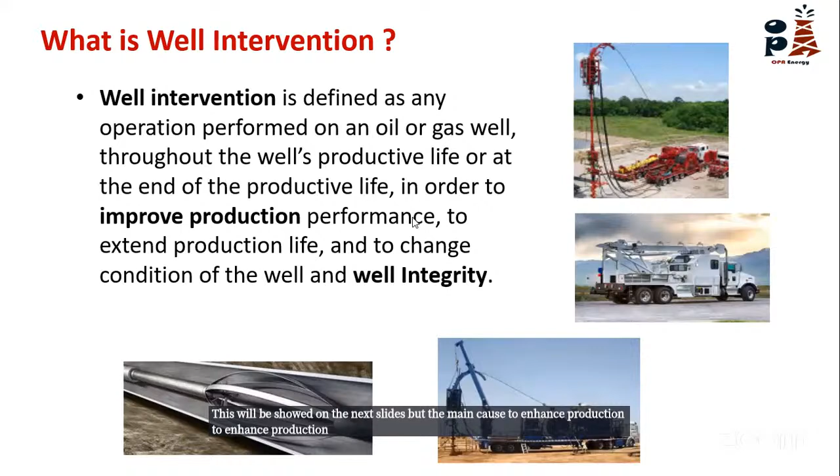What are the most common techniques used in well interventions? We have wireline, coiled tubing, and snubbing unit. These are the most common well intervention techniques.

Wireline has four types: slickline, e-line, braided line, and digital slickline. All four are called wireline, not just slickline or e-line. Wireline, coiled tubing, and snubbing are all types of well intervention. Each technique has a unique application and advantages that we will explore in the next slides.

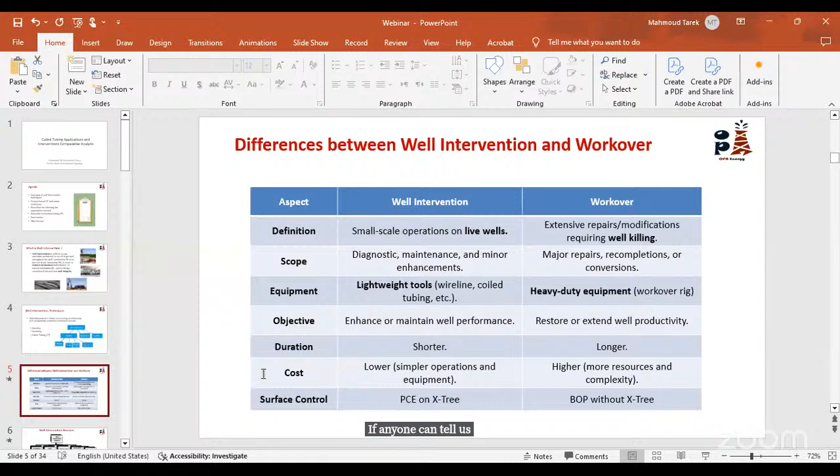Let's break the ice with a question. Can anyone tell us, in the chat box or by voice, what is the difference between well intervention and workover? You can simply raise your hand and I will open the mic for you, or just type in the chat box.

Hello. Okay, go ahead, Emily. Thank you, sir, for the privilege given to me to answer the question, sir. I think one of the differences between workover operation and well intervention...

The workover operation has to do with trying to revive a dead well, while for well intervention you are working on a live well that is still producing, but the production rate has declined drastically and you want to revive it. For workover, the well is dead already, no longer producing, but you want it to be producing again. This involves rigorous activities because you have to remove the completion and install a new completion for the well to be restored back into production. Thank you, sir.

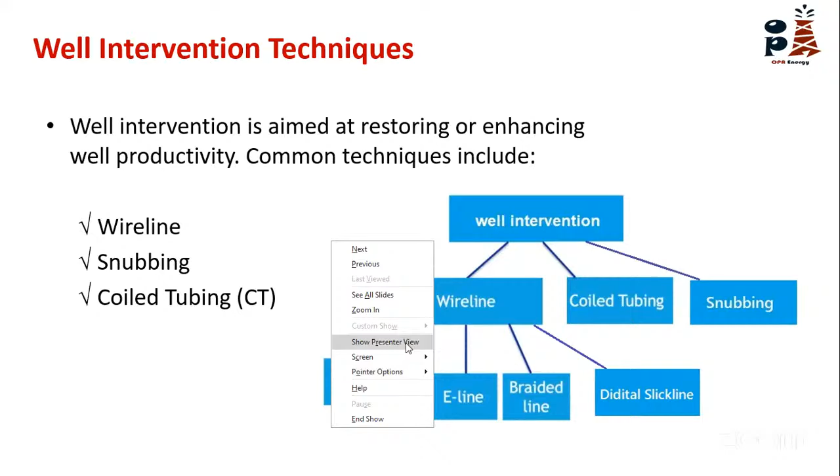As Emily said, the main difference between well intervention and workover: well intervention is implemented on live wells, and workover on killed wells. A live well doesn't mean open or closed, but capable of flowing. In live wells, the hydrostatic column in the wellbore is lower than the reservoir pressure. In a killed well, we introduce a hydrostatic column to overcome the reservoir pressure through the wellbore.

Other main differences: in well intervention we introduce lightweight tools such as wireline and coiled tubing, while for workover we introduce heavy duty equipment using a rig. Also, in well intervention the duration is shorter and the cost lower, but in workover the duration is longer and the cost higher.

For surface control, we use PCE, pressure control equipment, on the Christmas tree for well intervention, including lubricators and pipe joints to contain the pressure over the well. In workover, it's BOP without a Christmas tree in most applications. Is it clear?

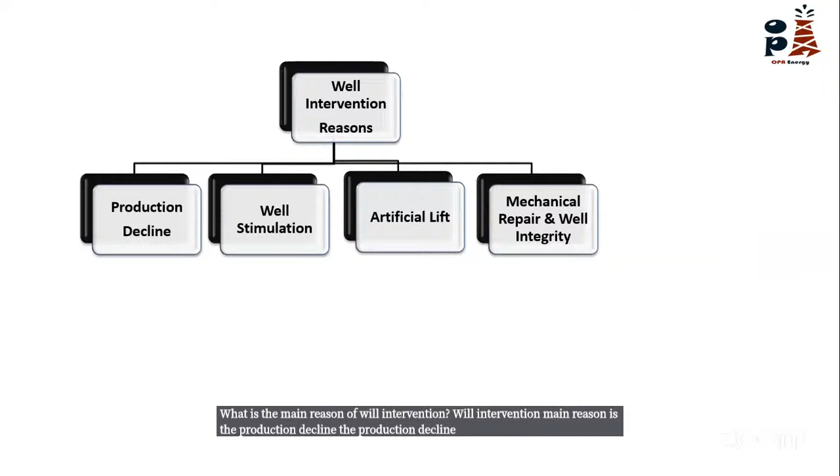If you are a production engineer in your company and you have a well issue, you have the decision to take the well intervention method to implement and solve the production decline effect. The production decline problem can be solved using one of the well intervention techniques.

For example, if you have a producing well at 2,000 barrels oil per day, and after testing the well you find production has dropped to 1,000 barrels oil per day, what should you do as a petroleum engineer? You must find out the main cause. This is the importance of well intervention.

Either sand or scale deposition inside the tubing, or accumulation in the reservoir, should be removed using one or more well intervention techniques, as we'll see in the next slides. If there is increased water cut, you should do a water shutoff or a reperforation.

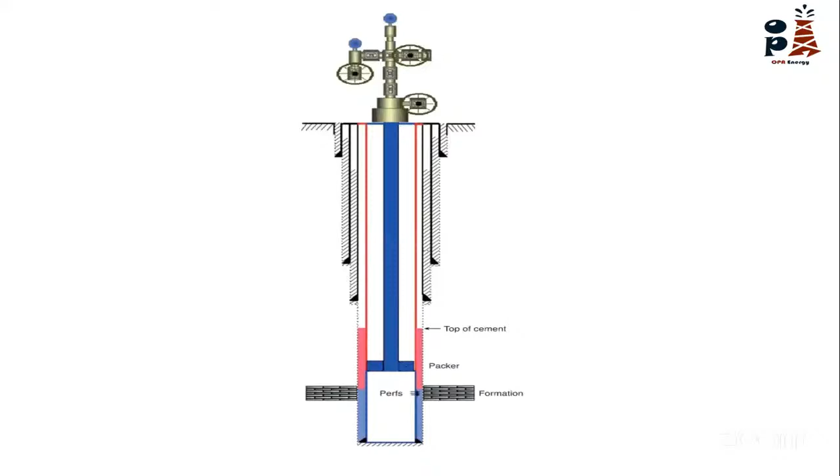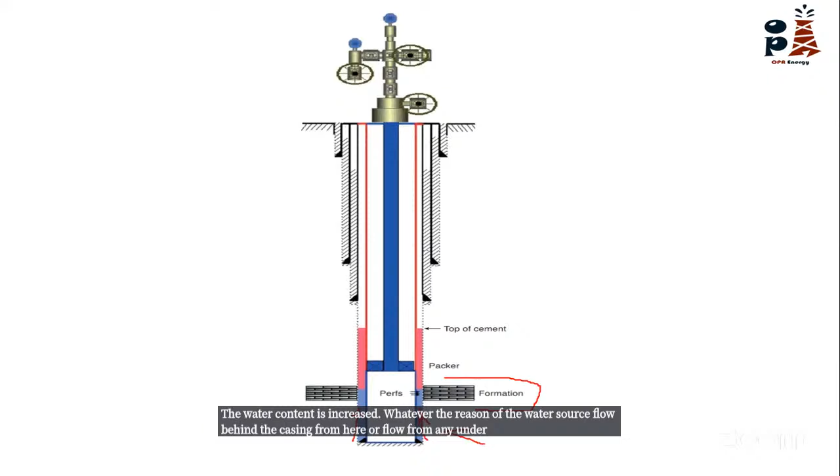Let's have a look on this well. What is the meaning of water shutoff? The concept of water shutoff is isolating the formation interval that contributes high water content, as we need to shut this interval off. The producing formation produces oil, water, and gas. So if the water content is increased, whatever the reason, whether water flow behind the casing from here or flow from any underlying formation, the water is invading this producing formation and the total water cut increases to the surface. So what can we do about this problem causing production decline?

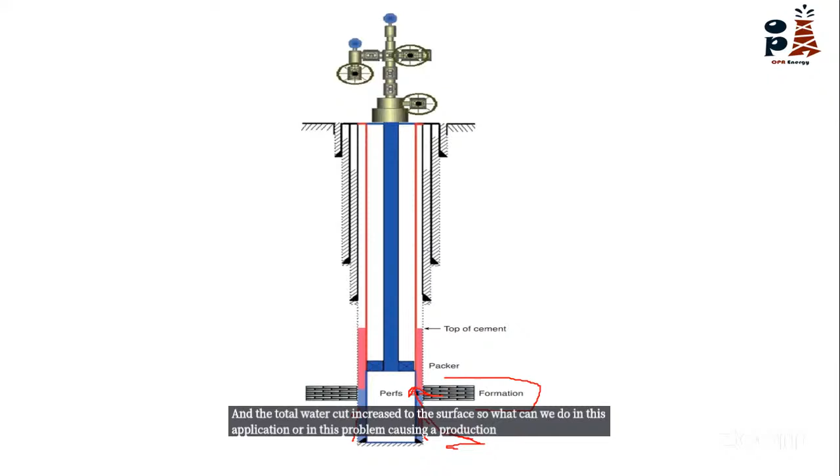You must firstly run something called PLT. What is PLT? Production logging tool, run in hole with wireline, electric line I mean. Wireline tools are deployed for this well with pressure and temperature sensors to read pressure and temperature of the formation and flow rates, which specify the contribution of water from each interval to know where the water content is coming from. This is called hold up, and it helps us know the exact interval location of the water source.

Secondly, after PLT, you may insert something called a through tubing bridge plug. This bridge plug is seated here to isolate the interval from water coming in, and after that we dump cement to isolate it, which is called a cement plug, to isolate the whole region the water is coming from. Finally, you may reperforate again in this region to reach the migrated or displaced oil, and to perforate a non-invaded, pure formation that is highly saturated with oil.

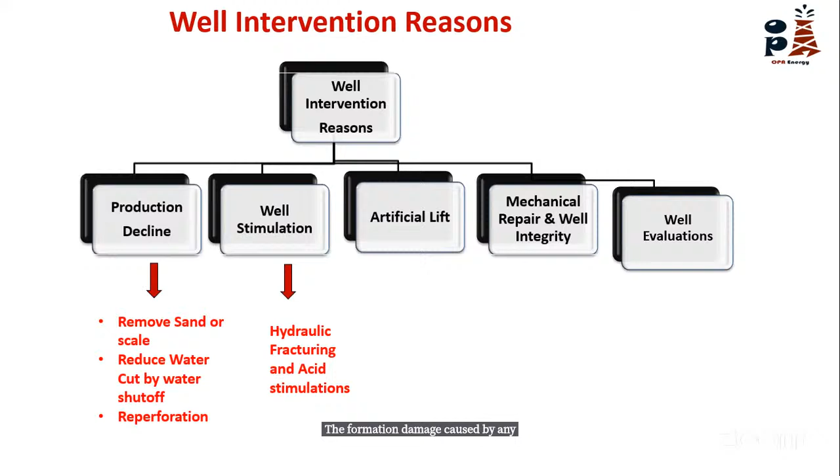Referring to the well intervention reasons, as we said, production decline may also lead to another well intervention application: well stimulation. What is well stimulation? Well stimulation is bypassing or removing formation damage. This damage can be caused by any reason, such as mud filtrate or low permeability reservoirs, which restricts flow. So we can use well intervention to solve this problem too.

What is the relation between artificial lift and well intervention? You may need to change or set new gas lift valves. In the case of slickline, we use it to change gas lift valves and also to set or retrieve jet pumps. Some artificial lift systems cannot be implemented or changed by well intervention methods, such as ESP, which will require a workover rig. Also, a mechanical repair or well integrity issue may arise, referring to our well here.

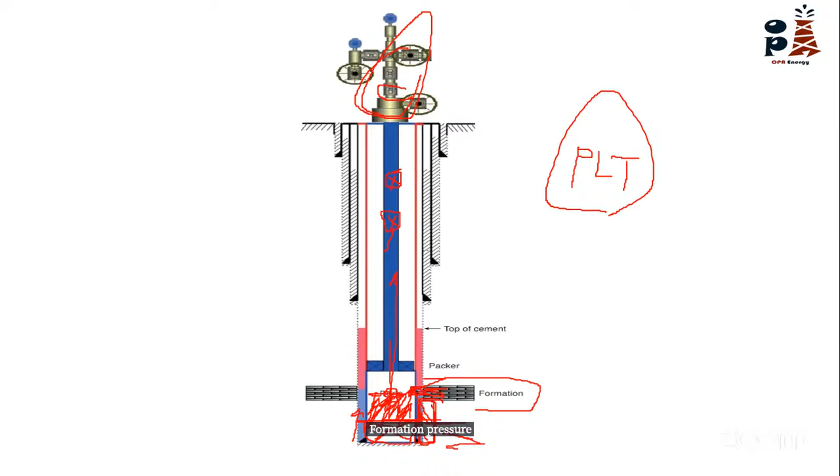If you have an issue in your Christmas tree, say a master valve is broken or damaged and you need to change this lower master valve or whatever, how can you change it? You must firstly isolate the formation, to isolate the well bore against the formation pressure. How do you isolate the well bore? By setting a plug, a nipple plug, set by slickline, one or two plugs to isolate the formation against formation pressure, isolating the well against it. So we need well intervention to make the mechanical repair and also to preserve well integrity.

Also, you may need well evaluations. Well evaluations, like we said, PLT, production logging tool, or logging, or pressure and temperature surveys, help evaluate your well to be proactive before any problem may happen. So it may happen, and you can go through this well evaluation using well intervention techniques.

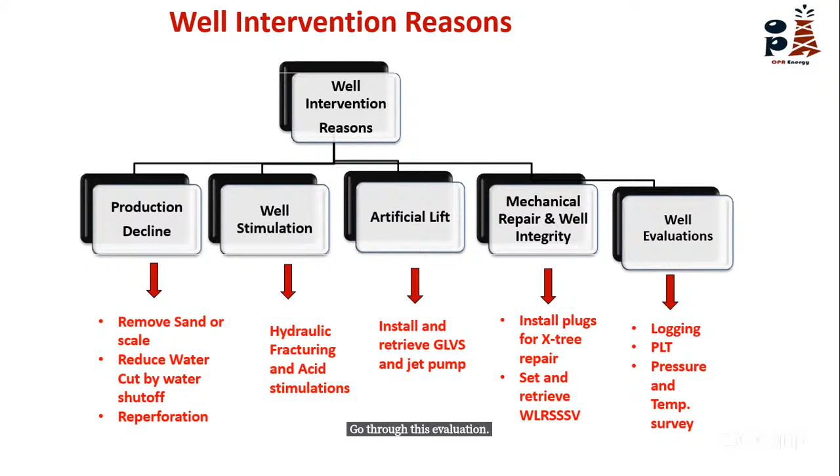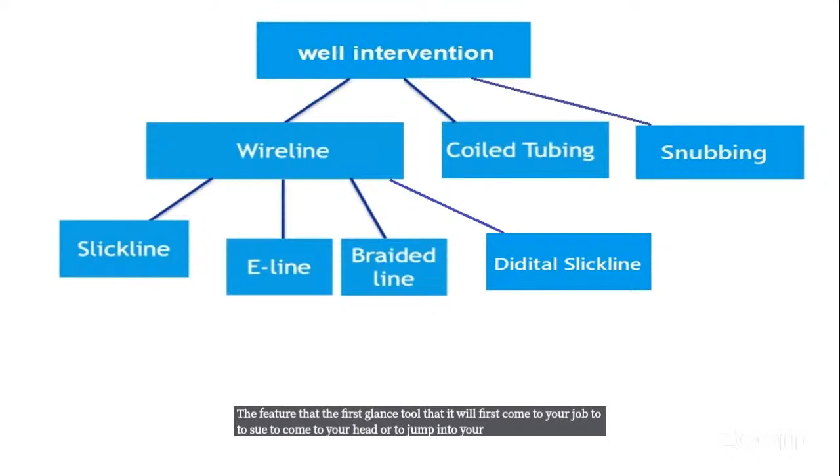What are the main advantages of each type? We need to know the feature that first comes to your head, or jumps into your mind, when you choose a well intervention technique. So when you say slickline, when you mention slickline, the first idea that comes to your head is mechanical jarring. Slickline's advantage is mechanical jarring, because it's a rigid line made from carbon steel.

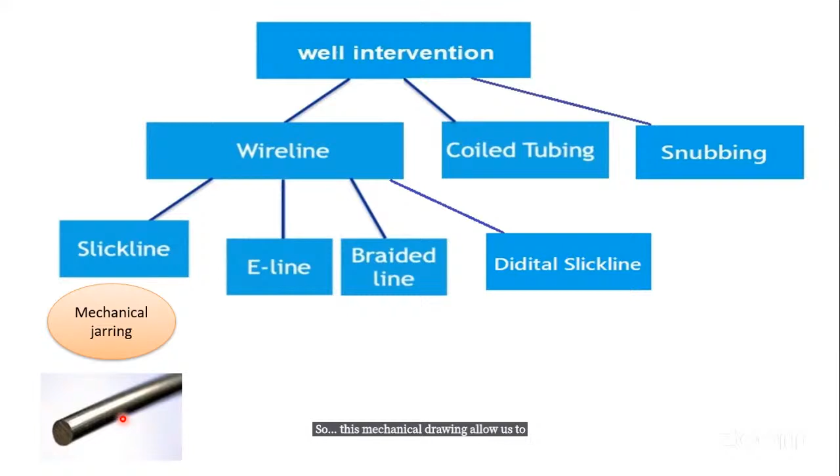It's a rigid line made from carbon steel or stainless steel, and has the elasticity and stretching for mechanical jarring. This mechanical jarring allows us to set or retrieve any subsurface tool, or to do drifting of the pipe, or cleaning through tubing by mechanical jarring.

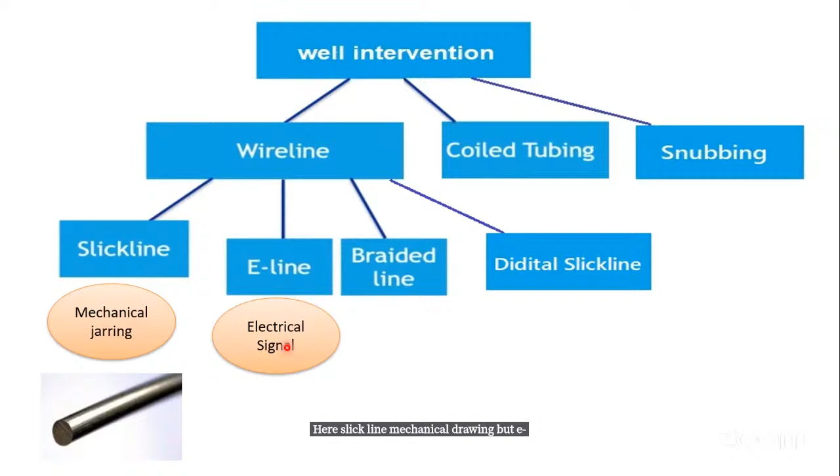E-line also uses electrical signal. Slickline uses mechanical jarring, but E-line uses electrical signal. Electrical signal can be transmitted through conductive cable. It consists of strands and a conductive core, which transmits electrical signal to receive and send signals downhole, which is called surface readout.

What can we do with E-line? Perforation, logging, and so on. Any application that needs electrical signal.

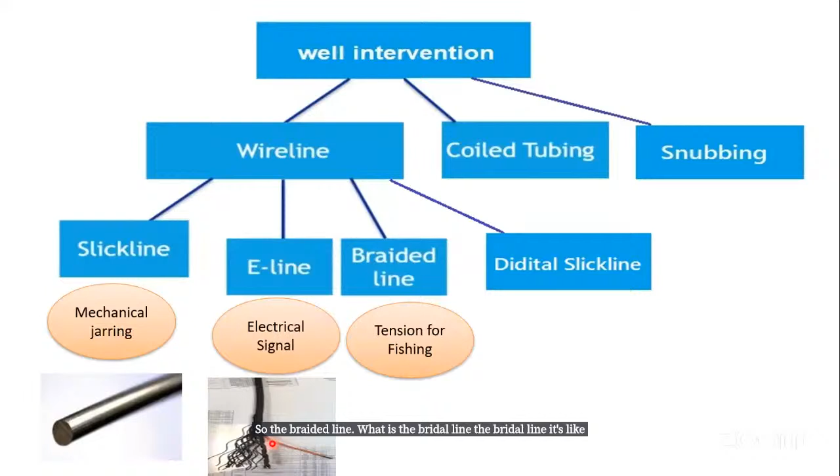The braided line - what is it? It's like E-line, but without its core. It's only a braided line, and it's used at higher tension for fishing.

Higher tension than what? Than Slickline. The E-line hasn't any mechanical jarring, but Slickline has mechanical jarring, so it can be used in fishing operations. Braided line can also be used in fishing operations, but at higher tension than Slickline. Slickline can go up to 3,000 pounds overpull, but braided line can reach 6,000 or 7,000 pounds overpull.

So it's used for fishing operations, as we see here.

For digital Slickline, it combines mechanical jarring and electrical signal, so it has the advantages of both Slickline and E-line. It's a conventional Slickline, but coated from outside with a conductive material to allow mechanical jarring and also electrical signals.

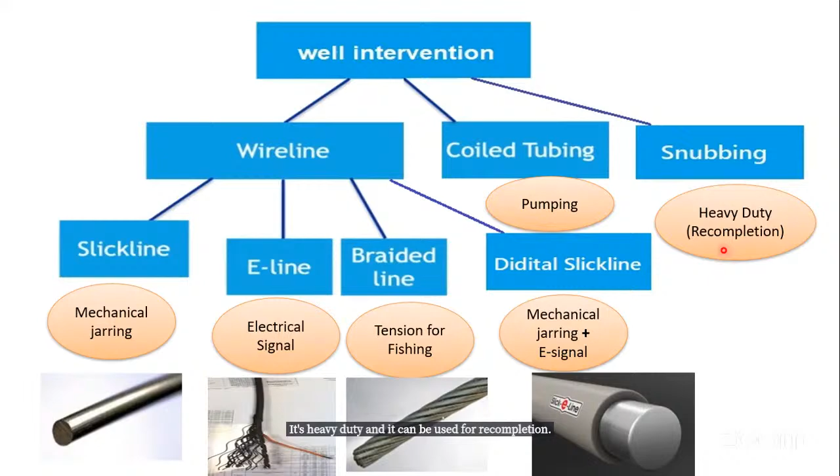Let's go over the types of well intervention quickly and have insights on them.

For Slickline, the objective and application: Slickline is primarily used for routine mechanical operations. Applications include tubing drifting by gauge cutter, or setting or removing plugs - mechanical operation enabled by elasticity that allows mechanical jarring.

Basic fishing operations - when we have a stuck tool, Slickline can be used. We rig up over the Christmas tree by installing a PCE, the lubricators. Inside the lubricators, we have the string of the Slickline, accessorized with a mechanical jarring tool.

This mechanical jarring does all the mechanical operations we need for gas lift valve change, or temperature and pressure surveys, but in memory, not live. Also basic fishing operations and setting and removing plugs, and so on.

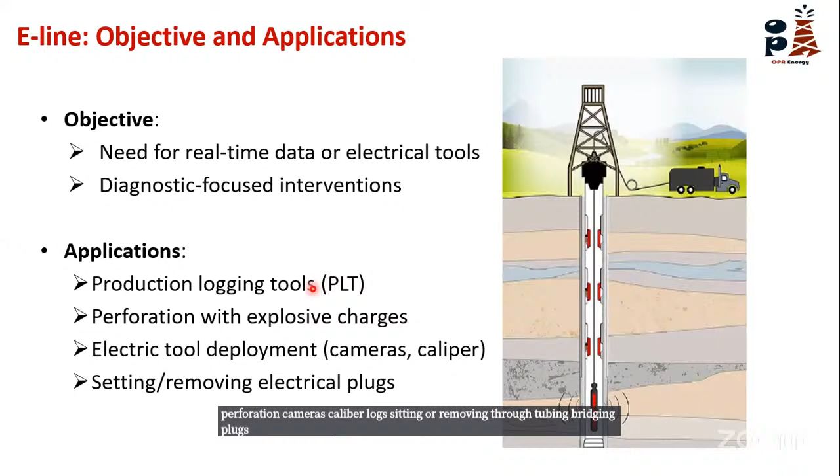Digital Slickline, as mentioned, is a conventional Slickline coated from outside with a conductive material, allowing mechanical jarring and also electrical signal transfer. Mechanical jarring lets you do drifting the tubing, collecting samples, setting and removing plugs like conventional Slickline. Electrical signal gives real-time data, monitoring data while performing the job. It can do production logging tools (PLT), perforation, and so on.

It has some limitations. Digital Slickline is not capable of strong mechanical jarring actions - this is to protect the conductive coating material. If we make a strong jar, we can lose or fracture the outside coating material, so it has a limitation on mechanical jarring compared to conventional Slickline.

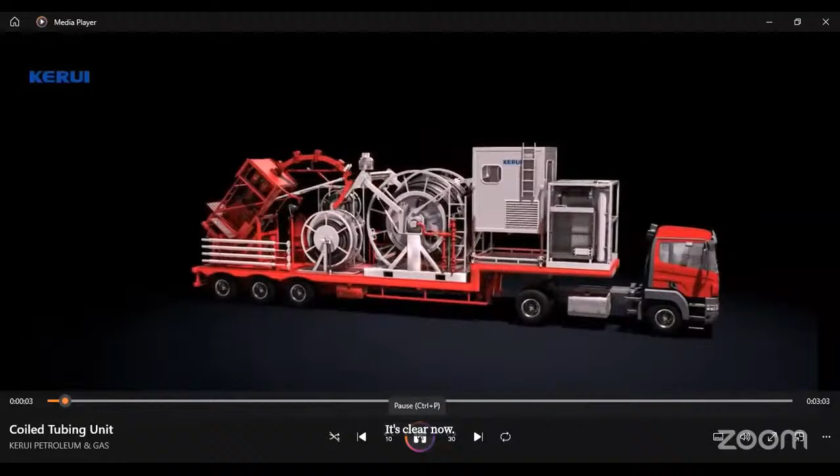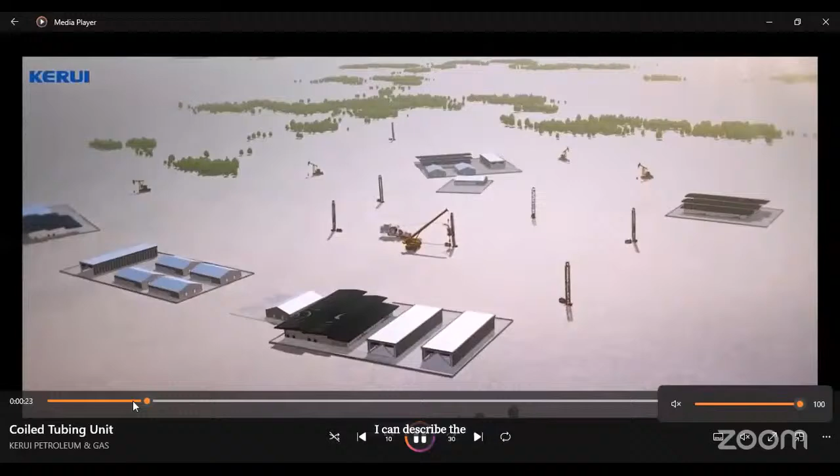Sorry. Okay, it appears now. It's clear now? Yeah, it's clear now. But it has no voice. No sound? Let me share this. Still has no sound. Yeah, still no sound. Okay, I can describe the video. It still has no sound. Yeah, still. Okay.

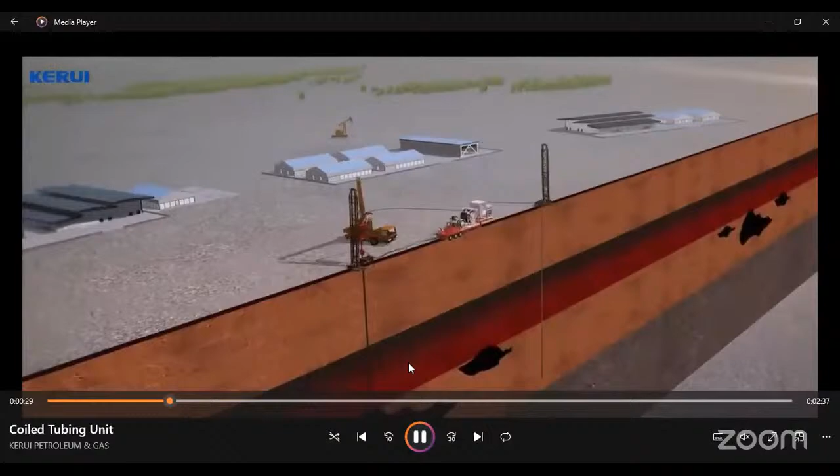As you see here, the coiled tubing unit is used. In this video we will see the surface equipment: the reel, as you see, and this is the injector. It's a continuous pipe, as you see here, wound around this reel to implement your job. This continuous pipe is used for most of the well intervention applications we have mentioned. As you see here, this red pipe is the coiled tubing, and down here is the BHA, whatever the application is used for.

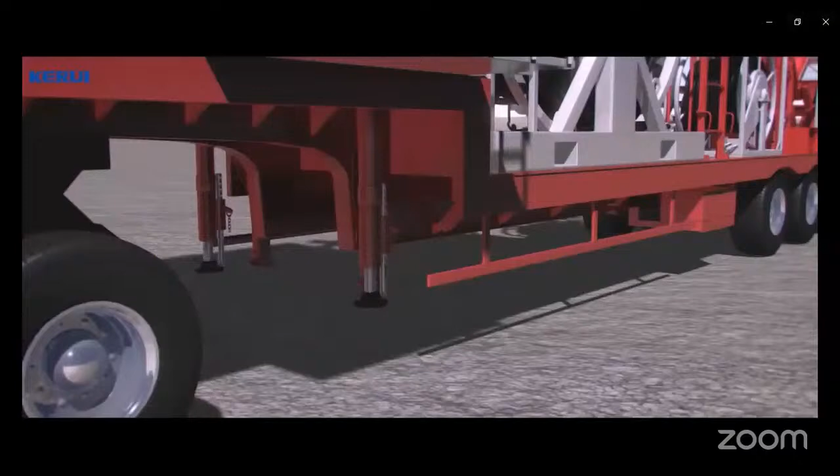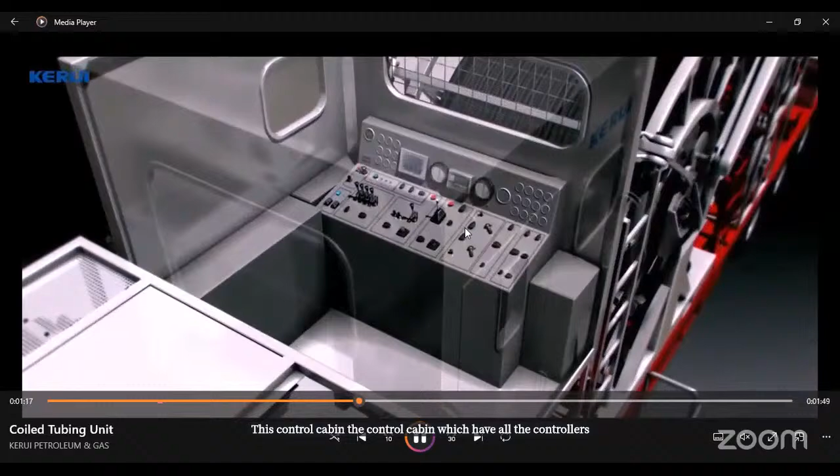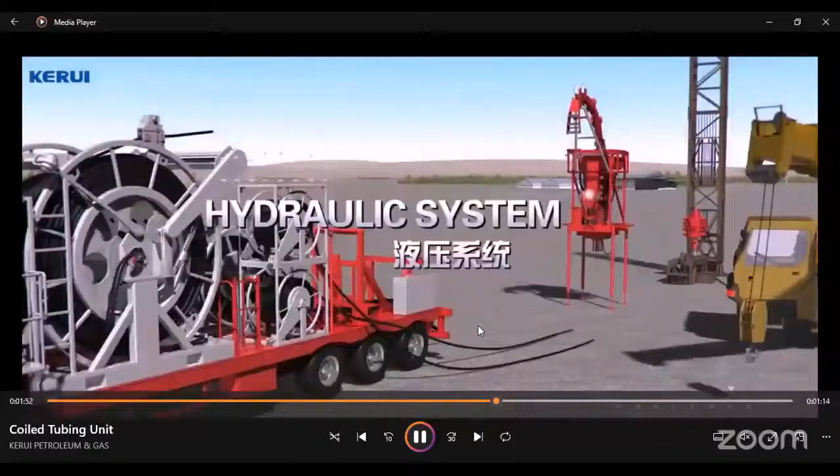There is an on-site rig up. This is a control cabin, which has all the controllers that the operator will use to control the movement and the hydraulic operation for coiled tubing. This is called the combi BOP. This BOP is installed over the adapter flange on the wellhead, and the rig up is completed by lifting the injector over the riser or the BOP and connecting all these hoses to complete the hydraulic cycle of the coiled tubing, and this is called the gooseneck.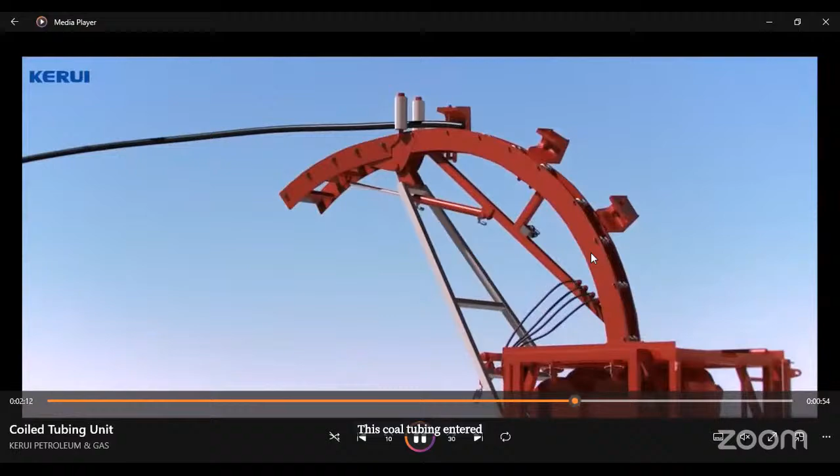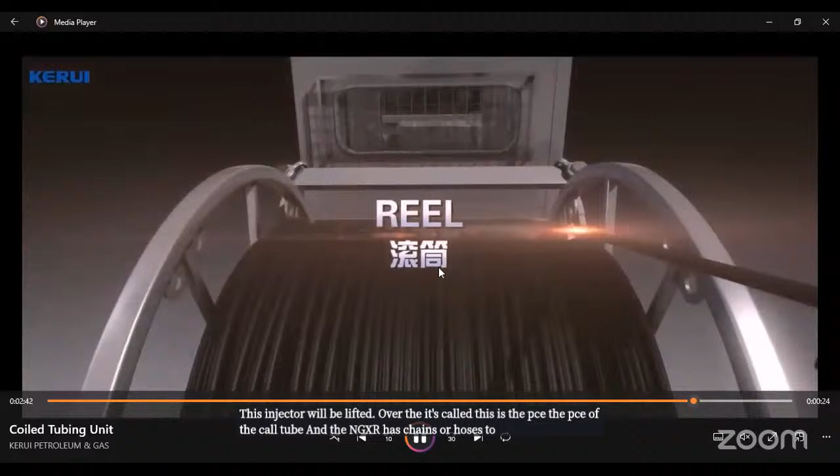This coiled tubing enters over the gooseneck and down inside the injector, and the pipe can be injected downward through the tubing. This injector will be lifted over the PCE of the coiled tubing. And the injector has chains to snub the coiled tubing inside the well. The coiled tubing reel has some accessories like the level wind and counter reading and so on. It will be described later in the 5-day course.

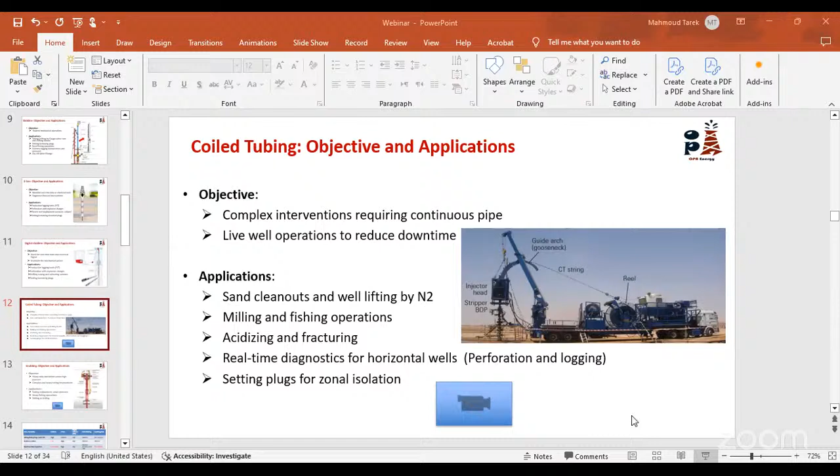Okay. Well, back to our presentation. Okay.

Now, for coiled tubing applications. As we see in the video, by this continuous pipe lowered into the wellbore, we may do a lot of applications, such as sand clean outs and well lifting by nitrogen. This pipe can go downhole to remove any sand fill, as we will see in the next slides, and we can do lifting or unloading of the well by nitrogen. We can also use downhole motors for milling and fishing operations.

This milling and fishing operations can be conducted by coiled tubing. Fishing operations by coiled tubing have a main advantage of higher tension capacity. As we said, slickline can be used up to 3,000 pound overpull. Braided line can be used up to 6,000 pound overpull. But the coiled tubing, to know the difference, can reach 80,000 pound overpull. We also have acidizing and fracturing, which can be implemented by coiled tubing, all by pumping operations.

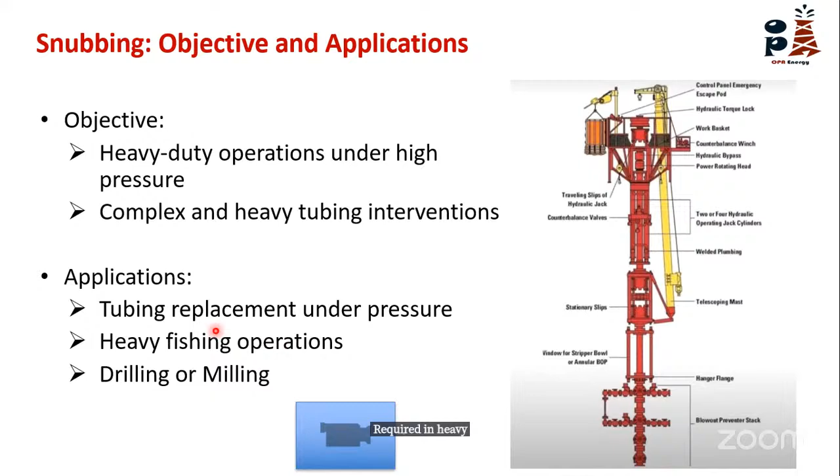Let's have now a comparison between all of these types of well intervention. As we said, setting or pulling plugs inside tubing will be preferred by Slickline, because it has its ability as a mechanical action to set or retrieve anything inside the tubing.

For E-line, it will not be commonly used. Digital Slickline simulates the Slickline, so it will be high also. For coiled tubing and snubbing unit, it's not common to deal inside the tubing. But coiled tubing can do some applications inside the tubing, or setting plugs inside the tubing also.

Depth correlation: the highest depth correlation is with E-line. Why? Because it's live, interactive, real-time data with the well, known as CCL, casing collar locator. CCL or gamma ray are used for depth correlation. So these interactive tools while performing the job give us the most accurate depth correlation.

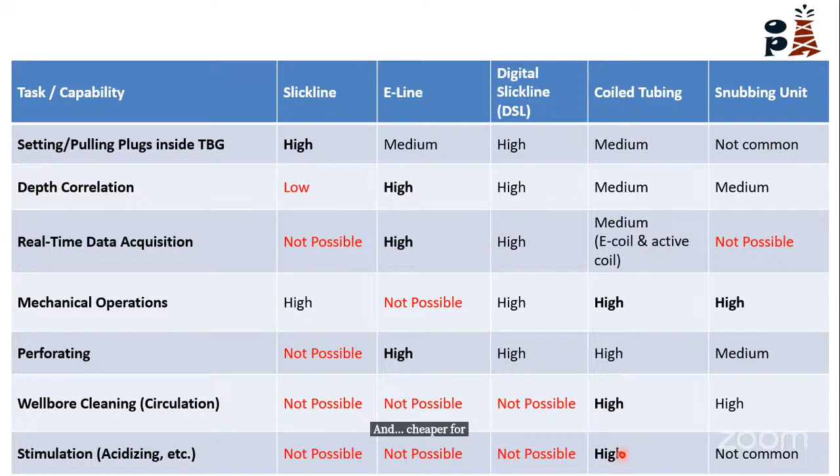Okay, for wellbore cleaning, when we mention circulation or pumping, our hero will be the coiled tubing. Coiled tubing is the most applicable and effective well intervention technique for pumping and circulating downhole. Also the snubbing unit, but coiled tubing will be faster and cheaper. For stimulation also, as we mentioned before, stimulation can be done by coiled tubing. If we compare all types of fluid pumping, we will choose coiled tubing.

And it's important to know that for horizontal or highly deviated wells over 70 degrees of inclination, coiled tubing is the most applicable, and also snubbing unit. So the rule of thumb: when you are dealing with a horizontal or highly deviated well, you will choose coiled tubing. As we said, for fishing operations, the highest capabilities are in coiled tubing and snubbing unit.

The cost efficiency. Which are the most costly well intervention techniques? Snubbing unit is the highest cost. Then coiled tubing is cheaper. Then digital Slickline, and in the last line come E-line and Slickline.

Digital Slickline and E-line can be the same. In some applications, E-line is higher cost than digital Slickline. But the cheapest one is Slickline, and the highest cost is the snubbing unit. It's like the workover. It's cheaper than a workover rig, but it's the most costly well intervention technique.

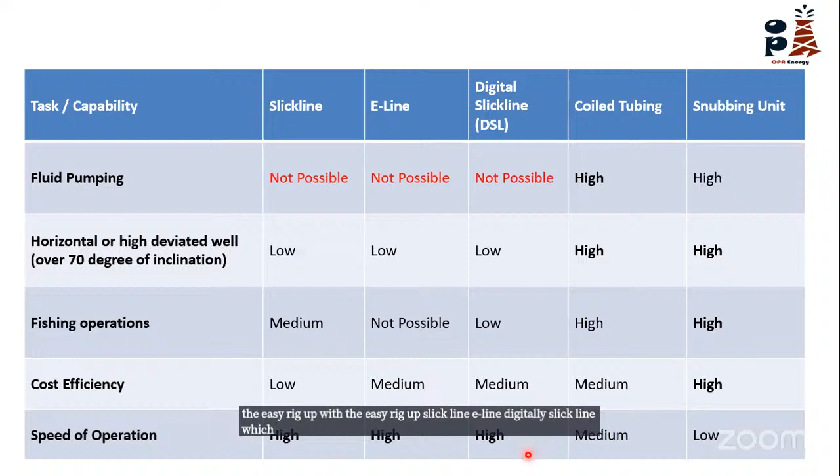For coiled tubing and snubbing unit, it will be slower, and the slowest one is the snubbing unit. So you can know your application or task or capability you have, and from this you can choose the well intervention technique that we can use.

So let's dive into coiled tubing. Coiled tubing, as we said, is a continuous pipe. The idea of continuous pipe is this pipe is wound around the reel, and this continuous pipe will reach to the bottom hole, so we can pump through it. In snubbing unit, you must join every single tubular or drill pipe or tubing together through the connection, so it will be slower than coiled tubing.

Coiled tubing will be faster as it is one continuous pipe introduced into the well, which is reducing the downtime, and can do all applications of cleaning, fluid pumping, nitrogen lifting, and so on.

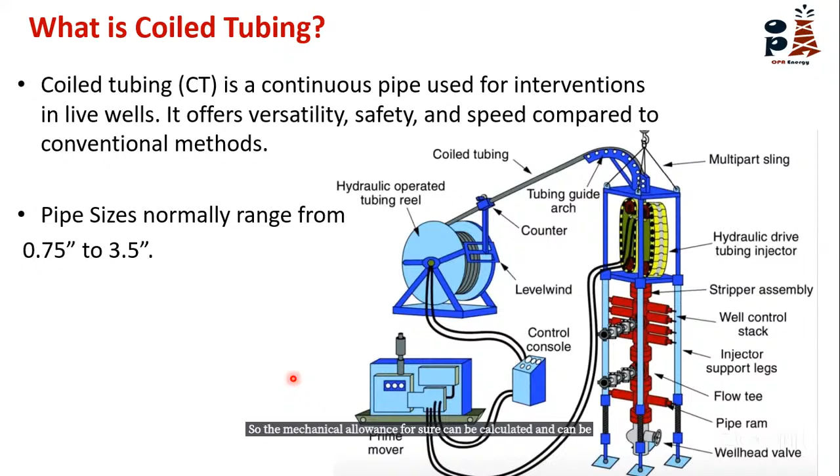Okay, to continue, now we are talking about the advantages of coiled tubing. As we said, there is no need to kill the well, and killing the well may cause formation damage, and the formation damage may raise a problem, and we need to solve it by stimulation and so on. So this will be saved by coiled tubing.

There is no killing fluid introduced to the well, and we can do applications with live wells. So it can also save time and cost, and it can perform the operations efficiently without any downtime. As we said, optimized job design: we have mentioned pipe management and fatigue management, and also all calculations needed, the speed you are lowering the coiled tubing with, the maximum allowable tension or tensile force, and so on.

So what are the main categories of coiled tubing operations and applications? We have three main categories: pumping operations, mechanical operations, and permanent installations. As we said, coiled tubing is our hero for pumping operations. Any pumping operation you need, you will use the coiled tubing.

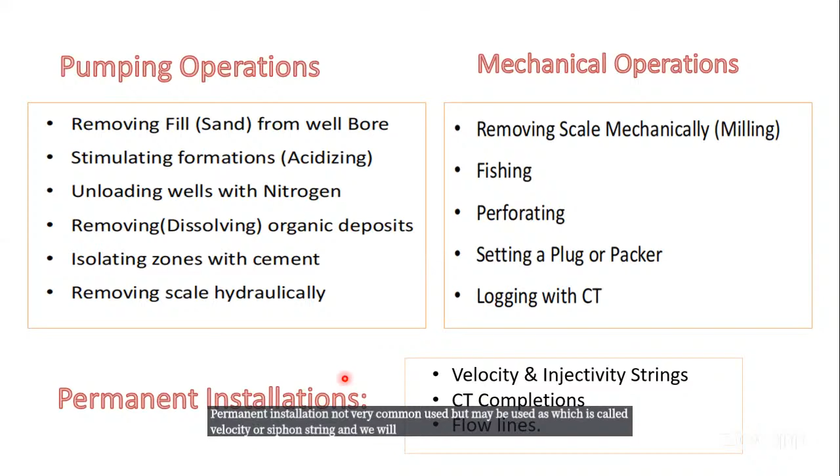Mechanical operations with electric line can also include perforating, or we can use it as TCP, tubing conveyed perforation. And can we do logging with coiled tubing? Yes, we can do logging with coiled tubing. Permanent installation is not very commonly used, but may be used as what is called a velocity or siphon string, and we'll discuss it at the last slide, I think.

The most common uses for coiled tubing, as we said, are nitrogen lifting and cleaning. The pumping operation is the most widely used. Also, matrix acidizing, wellbore cleanout and cementing are the most common applications for coiled tubing.

If we review rapidly the advantages of coiled tubing over other techniques: coiled tubing versus slickline. Coiled tubing handles more complex interventions, simply pumping operations. Slickline doesn't have pumping operations. Slickline is simple and cost effective but limited in scope. Coiled tubing has more advantages and applications over slickline.

E-line also. The main difference: in the first example we illustrated, water shutoff, we can do it with E-line and we can do it with coiled tubing. What are the main criteria that will make you take the right decision between E-line or coiled tubing?

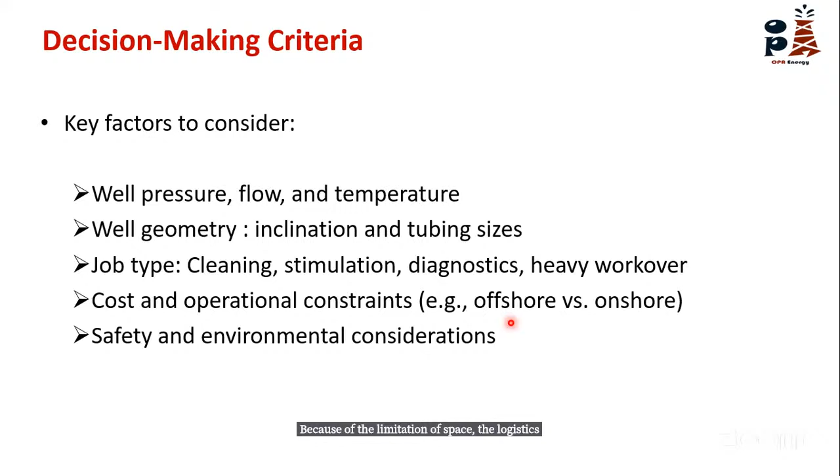Cost of operation and the location of the job: is it offshore or onshore? Because in some situations we can't do all types of well intervention offshore, because of the limitation of space, and the logistics can be difficult. So we may prefer some well interventions over others offshore. Okay.

So let me ask: is there one hero technique that can be used alone on all jobs? I think it's difficult to say, I will use coiled tubing for all applications, I will cancel all other techniques and use coiled tubing only. It's not logical and not practical. In our petroleum sector, there is no one hero technique that we will use alone in all jobs. So there are many integrations between well interventions.

I have an example here for this integration. Before I use, for example, coiled tubing for any application, before I move the coiled tubing to the well site, we can use a Slickline. Why? Here is where the integration comes. We can use Slickline before coiled tubing for drifting the tubing, for any obstructions or inaccessibility. For sure, we can use coiled tubing for this drifting, but Slickline is cheaper and faster.

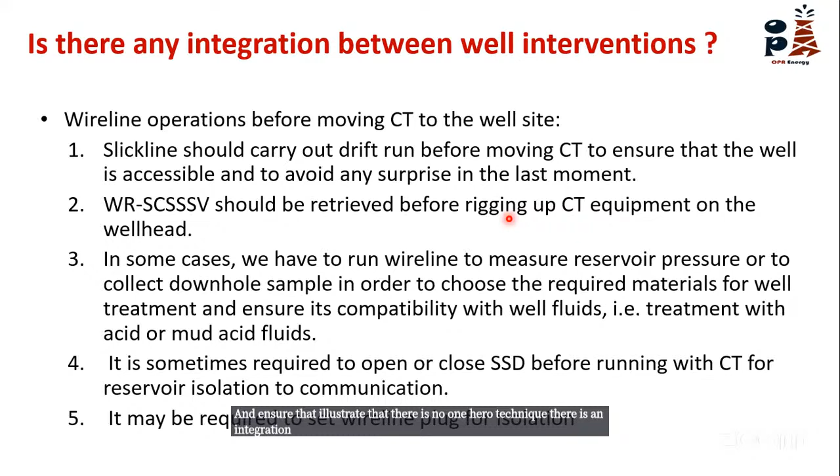A specialized technique for clean out is called hydroblasting or hydrojetting. It uses high jet nozzles pumping fluid from the surface to remove all the sand out of the well, from the annulus between the coiled tubing and the tubing itself, up to the surface. We can pump nitrified gel or simply brine water mixed with foam. This will lift the sand out of the well.

Here comes straight fluid or energized fluid. Straight fluid means only water, brine water, with some nitrogen. Energized fluid is a term used for foam fluids with foam.

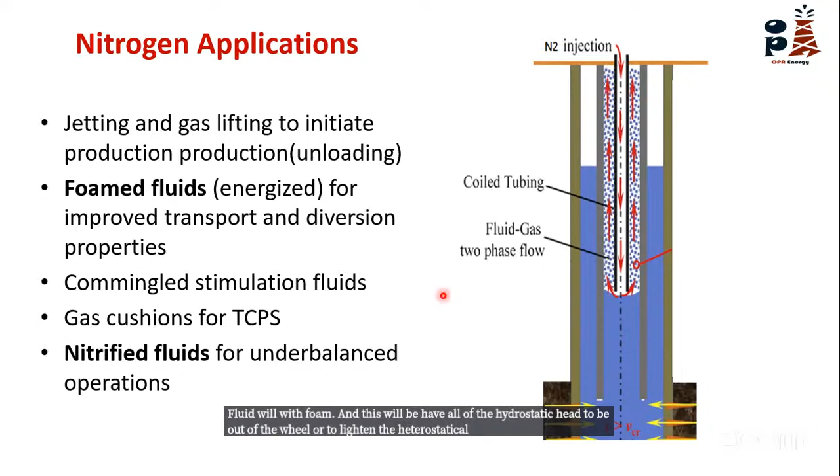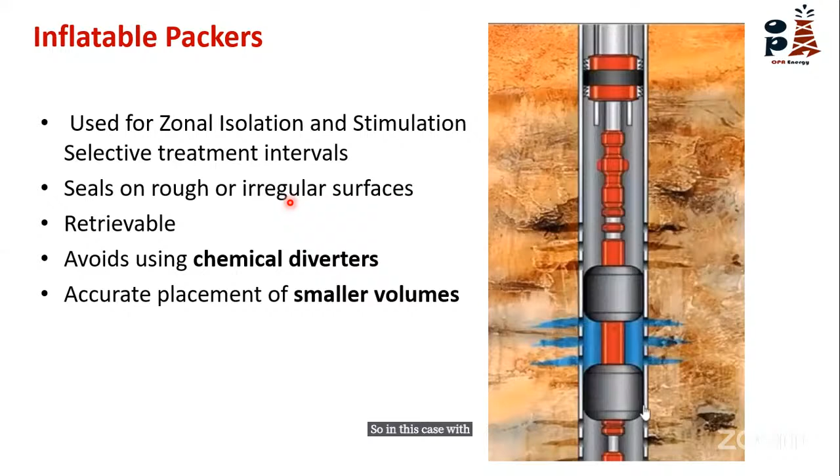What is the chemical diverter here? The chemical diverter is used in case of not using coiled tubing, in normal acidizing, to temporarily block this thief zone and divert acid to the lower permeable zone. So in this case, with inflatable packers, we don't need chemical diverters.

Also, coiled tubing perforation. As we know, there are many types of perforation techniques. One of them, important for underbalanced conditions, is coiled tubing TCP, tubing conveyed perforation, which can be run by coiled tubing or other tubing techniques. So tubing conveyed perforation is the gun attached to a tube. In this case, we are using coiled tubing, which gives us an advantage for high deviated wells, as we said.

In case of wireline perforation, the normal wireline perforation run over E-line can't reach high deviated wells, so we can use coiled tubing perforation in these applications. Stimulation and chemical treatments also, as we said, by pumping acids or hydraulic fracturing to the target zone.

If we see the difference between the two pictures here, on the left-hand side this is normal pumping, where we pump the acid from the surface till the formation. But here we use coiled tubing, which is injected to the target perforation. If the perforation or formation here is pumped during this target zone, we save all the treating volumes to the target zone by injecting the coiled tubing at the right location.

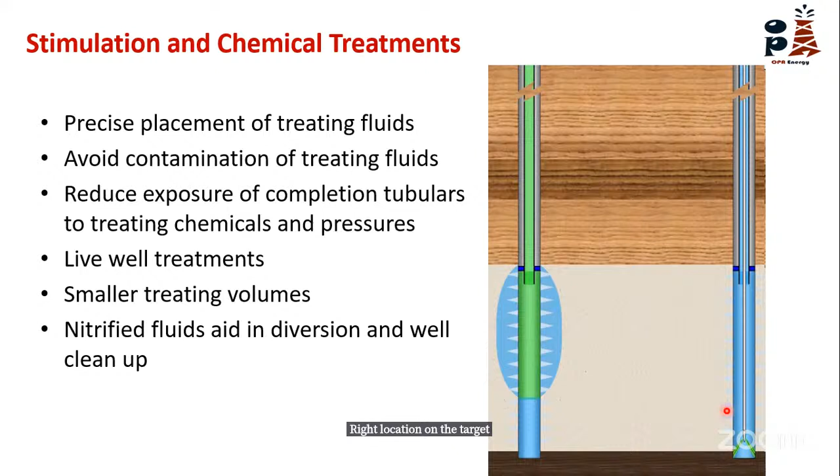And also after pumping the acid, we need a cleanup for this pumped acid, the formation damage, and debris, so we can use the coiled tubing to lift all the formation fill to be cleaned out by pumping. So we have two advantages here: we pump the acid to the target zone, saving the treating volumes, and also clean out after the acidizing.

The last application, not commonly used, is called siphon coiled tubing or siphon string. It's a smaller, permanent installation of coiled tubing inside the already existing tubing. Because of production decline or lower BHP, we can use a smaller coiled tubing to produce permanently through the coiled tubing itself. The well will produce through the coiled tubing with isolation by means of packers, using a smaller inside diameter than the existing tubing, applying nodal analysis to make a production optimization with higher bottom hole flowing pressure and to save our production.

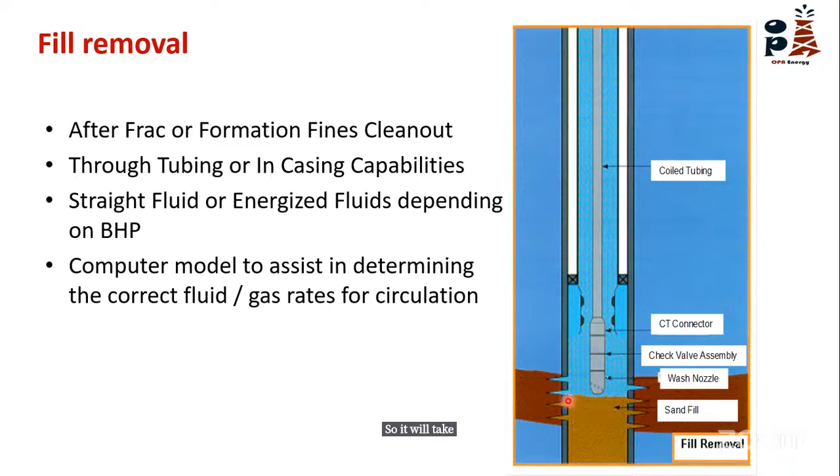Zonal isolation, I already mentioned at the start of our presentation, using coiled tubing and wireline. The coiled tubing spotted a cement plug and perforation was also done, so production improved by 40% recovery, and it was also a high deviated well, so it couldn't be done by wireline.

We are now at the end section of our presentation, so I'd like to thank you, and if you have any questions, I will hear you.

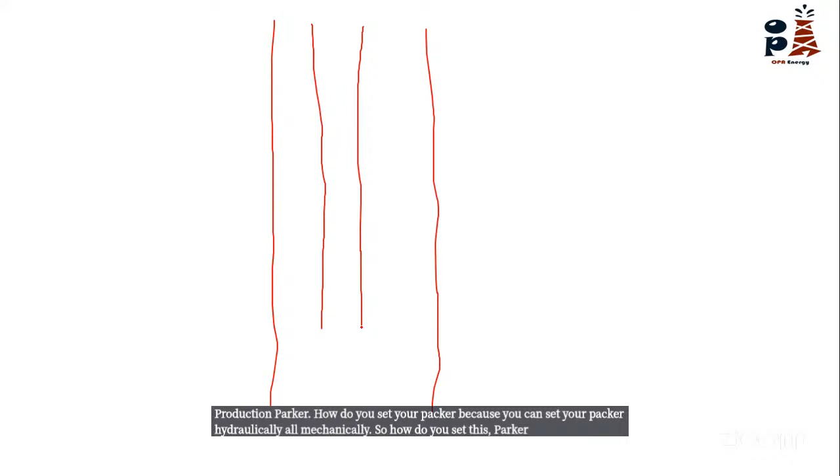Yes, with this piece of paper, for your first question about the production packer, how do you set your packer? Because you can set your packer hydraulically or mechanically. So how do you set this packer? Setting of your packer, you can set it hydraulically for the elastomer, which is the element that comes out and seals up the annulus. Are you with me?

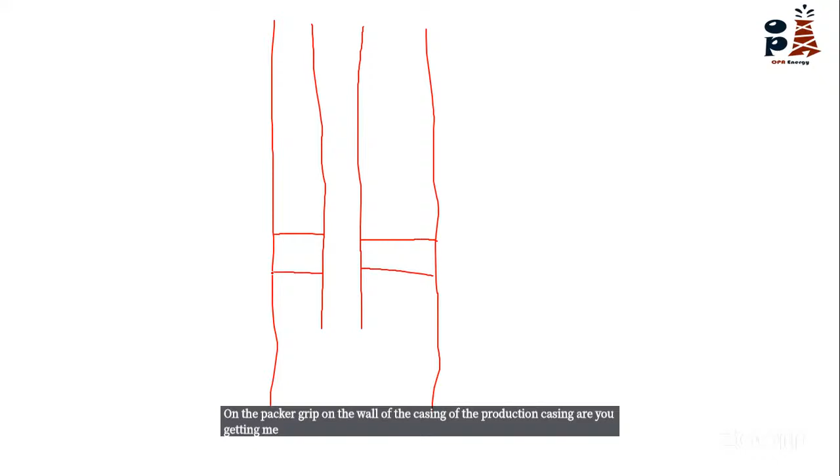Yes, now you can also set it mechanically to ensure that the slip on the packer grips the wall of the casing, the production casing. Are you getting me? You want to know how to set the packer with the Slickline? Yes, how do you set it hydraulically using your Slickline operation?

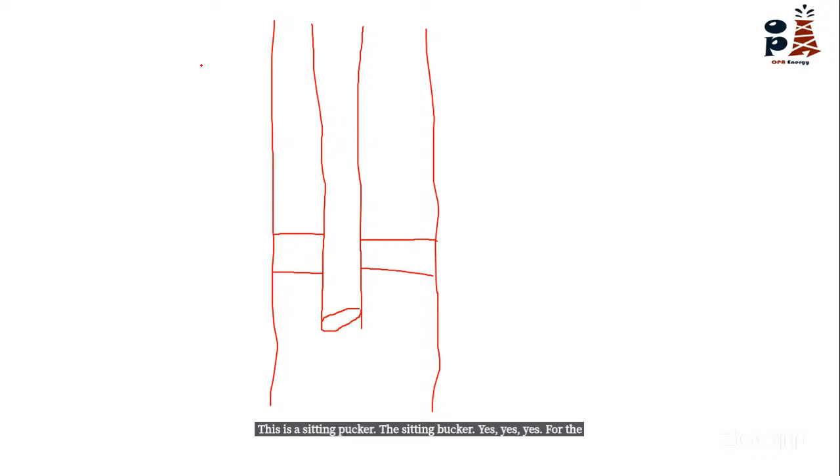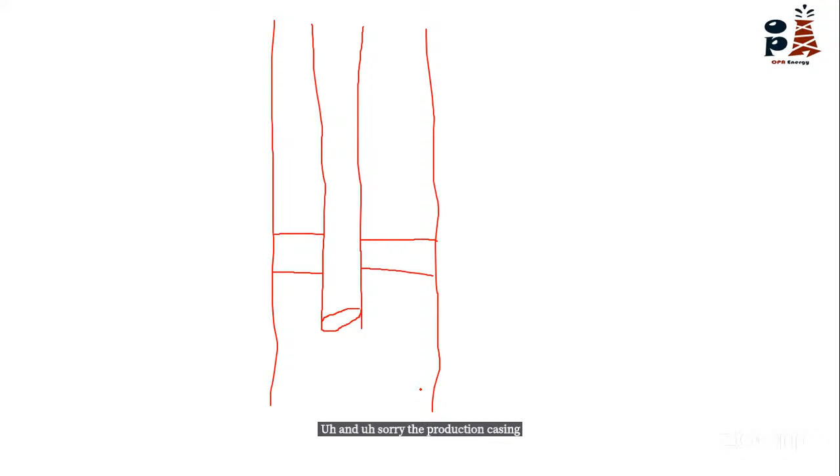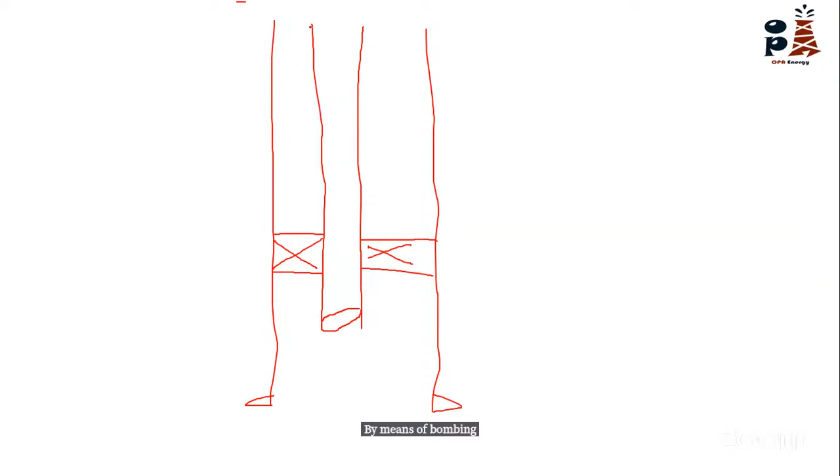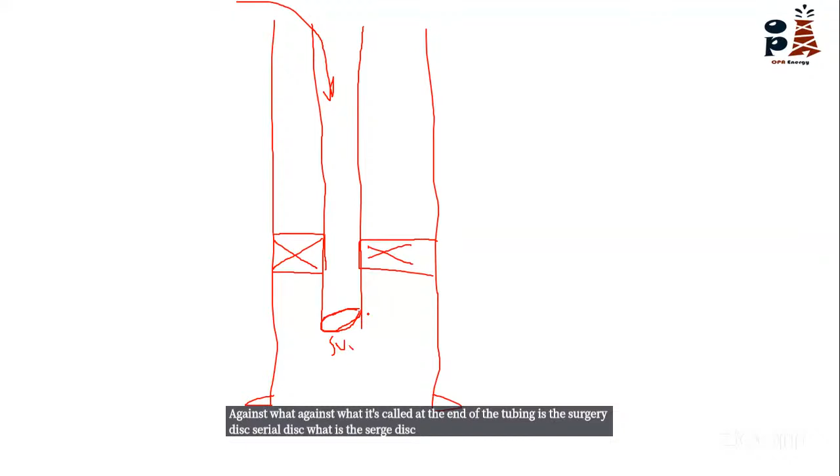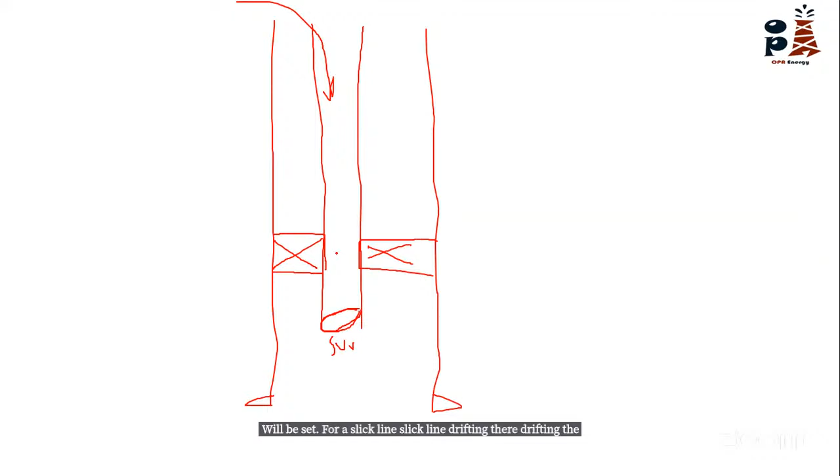This happens against what's called the surge disc at the end of the tubing. The surge disc is a ceramic disc that isolates the end of the tubing, and when you pump the fluids from here, the packer will be set. For a Slickline drifting inside the tubing, at the end of setting the packer, you will break the surge disc with a Slickline bar and allow this hydraulic column to settle down to the formation, and the hydraulic packer is set.

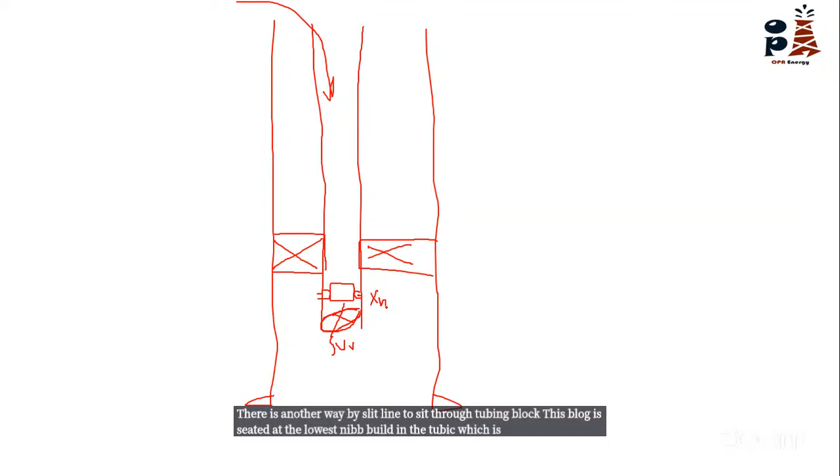There is another way by Slickline to set a through tubing plug. This plug is set at the lowest nipple in the tubing, which is maybe XN nipple. Nipple, yes, that is what I want to hear, sir. Yes, you have the X nipple or the XN nipple. Yes, the XN nipple.

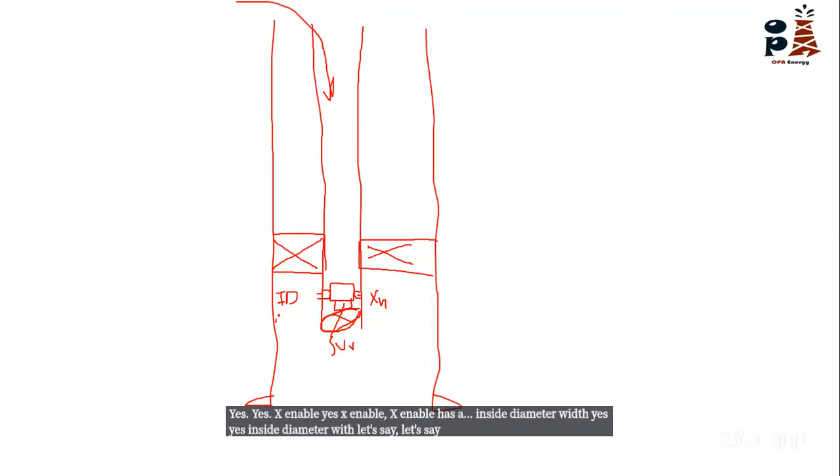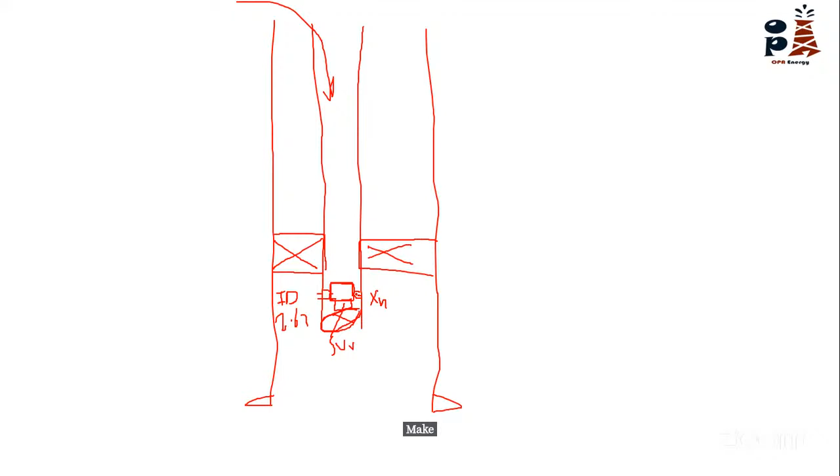The XN nipple has an inside diameter with no-go, let's say in 3.5 inch, 2.63, whatever. This nipple has a no-go profile, and the lock mandrel itself also has the no-go profile. This no-go will meet this nipple at this point and make a sealing with a packing inside the plug itself.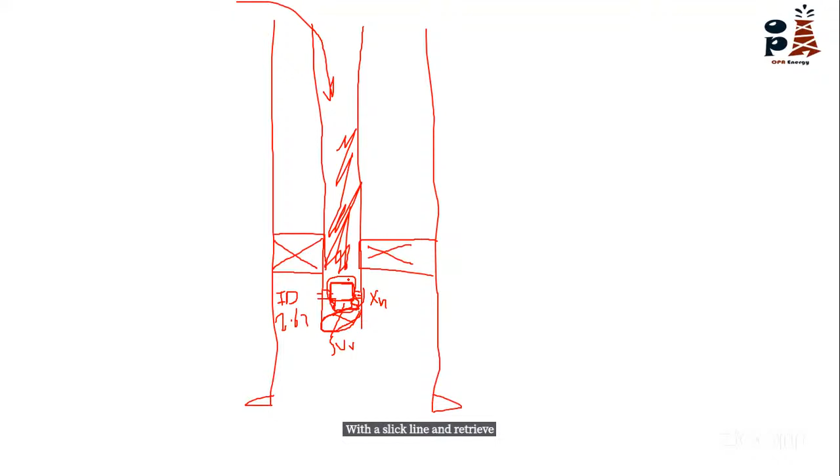And by filling this tubing with hydraulic fluid and raising the pressure, you set the hydraulic packer. When you set the hydraulic packer, you go through again with a Slickline and retrieve this plug by first equalizing the pressure to drop all the hydraulic pressure down the plug, and retrieve the plug.

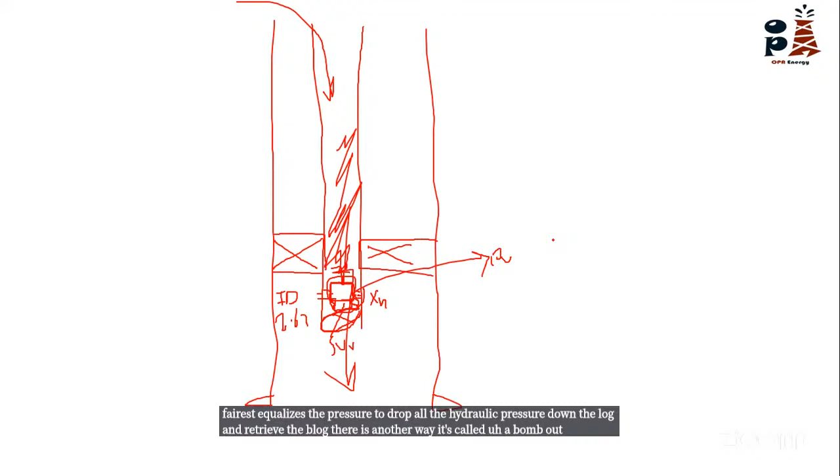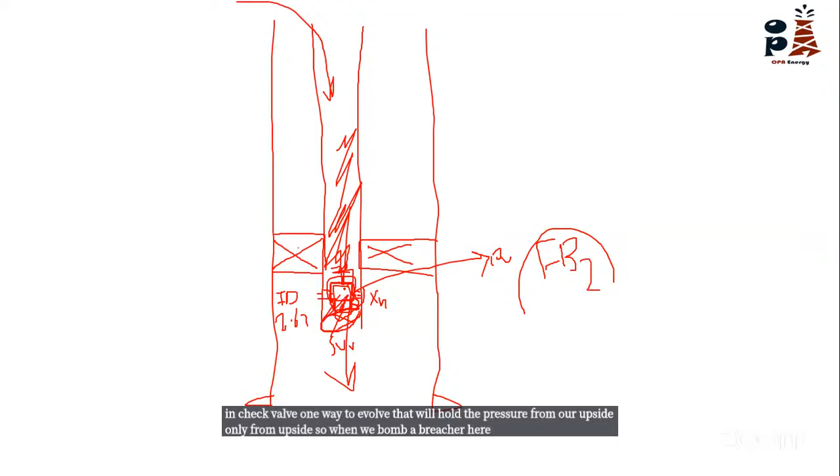There is another way, it's called a pump out plug, which is commonly known as FB2 plug. It's a one-way check valve that will hold the pressure from upside only. So when we pump pressure here, it will hold the pressure and set the hydraulic packer, and then after setting the hydraulic packer, by jarring up, it opens ports to equalize pressure down the plug, and we can retrieve them again.

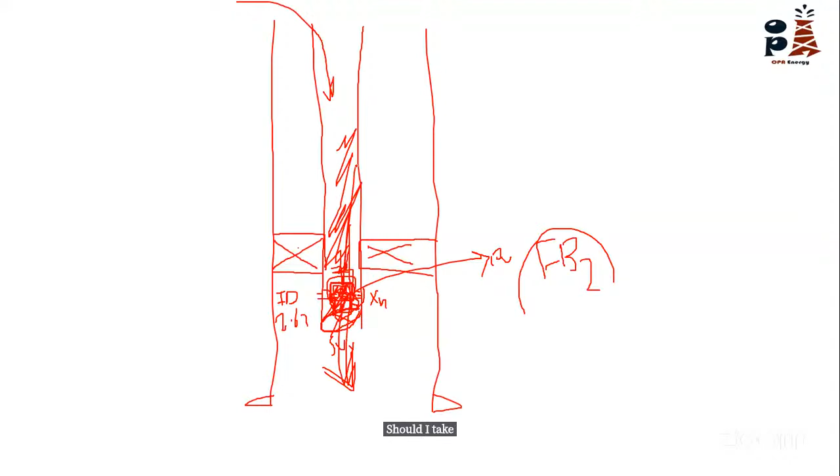Is it clear? Thank you, sir. It's very clear, sir. Very, very clear. So the second question, should I take it again? What is the second question? I forget the second. Okay, the second question is this.

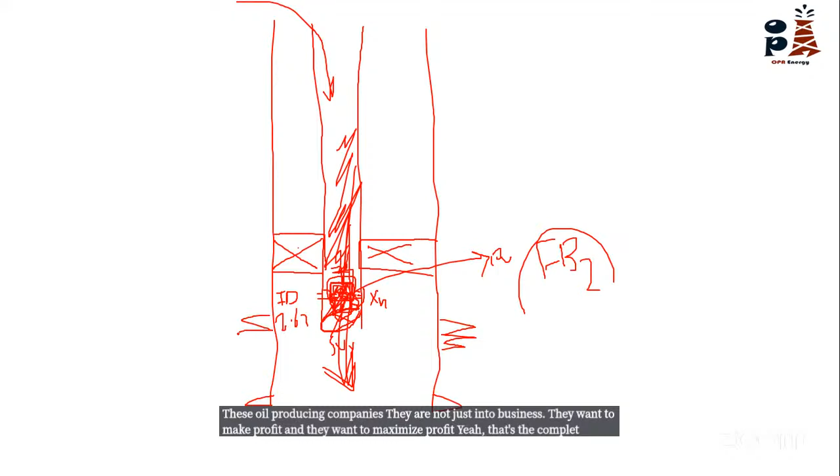Because the essence of these oil producing companies, they are not just into business, they want to make profit. You have multi-zones, right? There is a completion we call intelligent completion. Now I have a completion and I want to use only one production tubing to produce 3 pay zones, A, B, and C. And probably I was producing just only pay zone A. Are you with me?

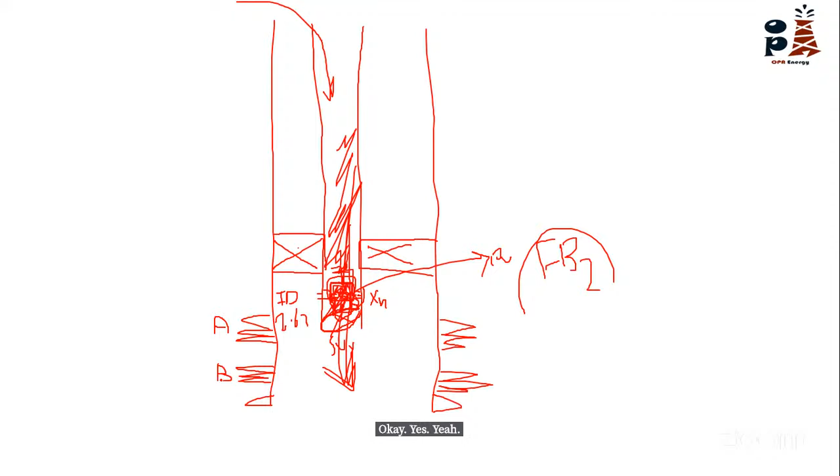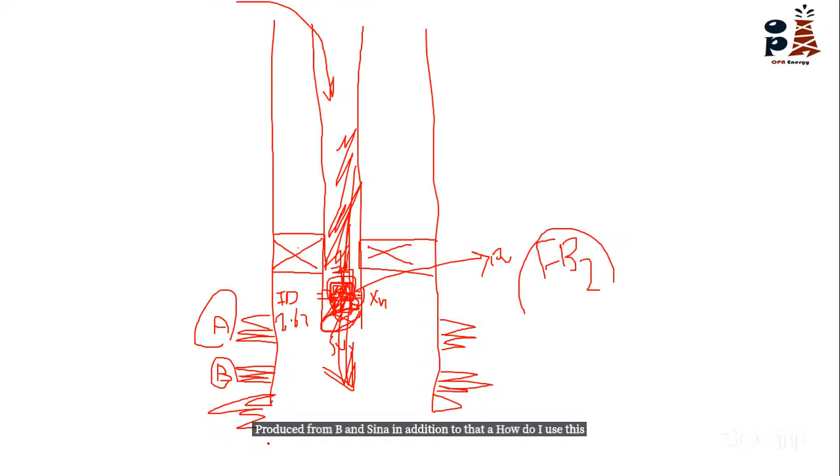As time goes on, I discovered that there is a drop in production rate, and I need to maximize my money as the owner of the well. So I want to produce from B and C now, in addition to A. How do I use this Slickline operation to bring pay zones B and C into production? Is this figure clear? You already produce from A, and you want to produce from B and C. Yes, B and C.

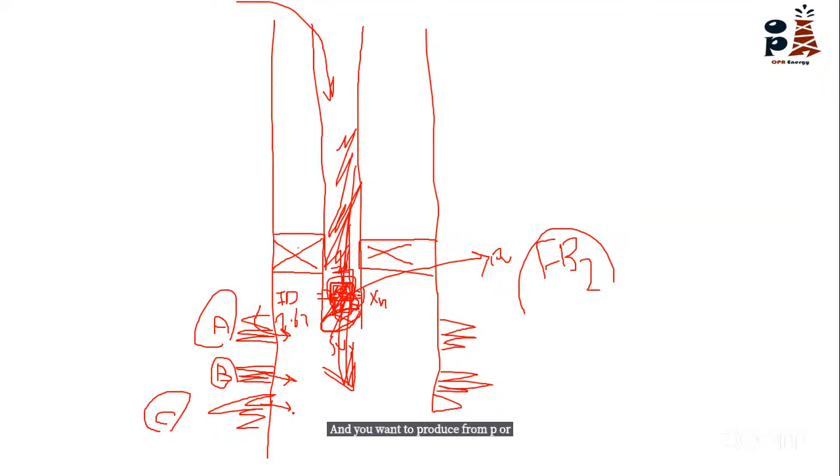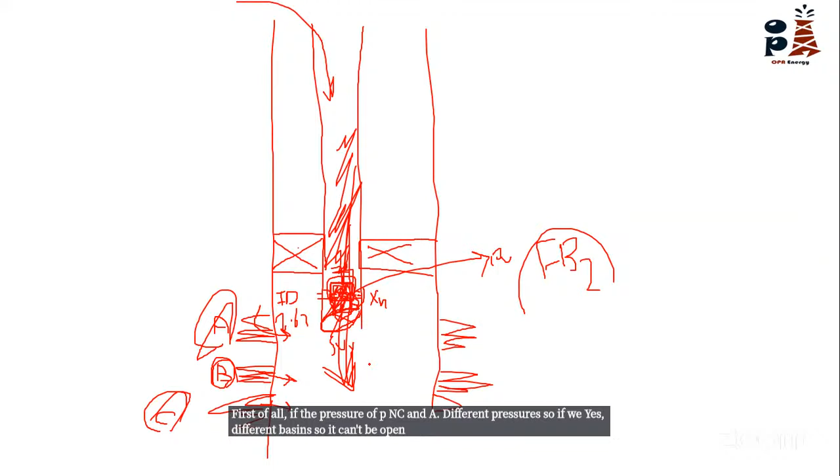Okay, it will be challenging for many reasons, but there is a solution for it. First of all, are the pressures of B, C, and A different? Yes, different zones. So they can't be open to production together, because there will be cross flow from higher pressure to the lower pressure. So we can use what is called a straddle packer. Do you know the straddle packer? Yes.

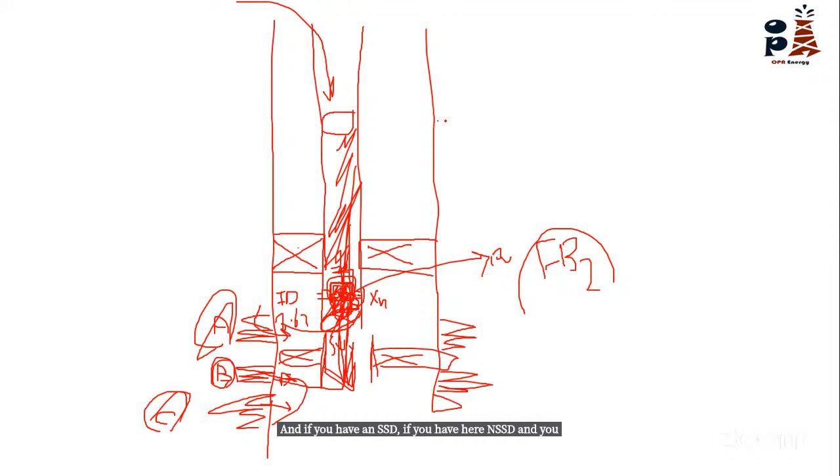The straddle packer is like this short tubing with a packer from here. This packer is set, and it will make this formation B produce with A. And if you have here an SSD and you have another formation here, you can open the SSD and produce from this formation also.

But for this situation, the best option is a straddle packer. A straddle packer will allow the formation to flow from this tubing and then enter this tube. And also you can isolate some of them. You can isolate A if it's a depleted reservoir, and to prevent cross flow, you can cement squeeze against this formation to isolate the lowest permeability and allow the higher permeability to produce.

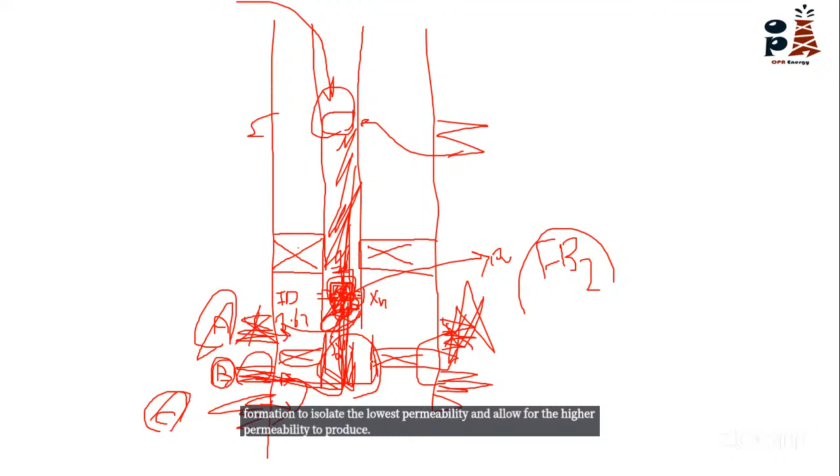If I may ask a question now, there is a kind of intelligent completion whereby you use your E-line to run down your subsurface control sensor to control the downflow, your pressure, and all the rest. So is it not possible for you to use this kind of downhole sensor and downhole valve to see that there is no bottleneck between these three zones in the subsurface?

Yes, of course. It's not applicable in our region till now. As you know, it's somehow a new invention. But I know what you mean, that there is smart completion which can activate, open or close these valves against the required formation to produce whatever you want. That's right. But it's a new technique and needs a new completion to be run.

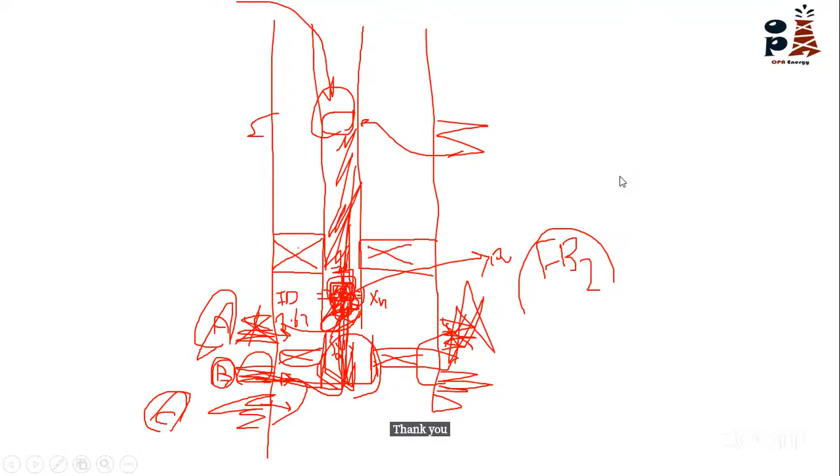Yes, yes. As we mentioned, TCP are mainly used now with coiled tubing, either by firing the head hydraulically or mechanically, or electrically. Hydraulic firing head with pumping the required hydraulic pressure inside the coiled tubing itself until reaching the firing head activating mechanism. There is a small surge disc inside the firing head, and this allows the hydraulic to initiate what is called the detonation mechanism. The detonator will give the action for the firing head